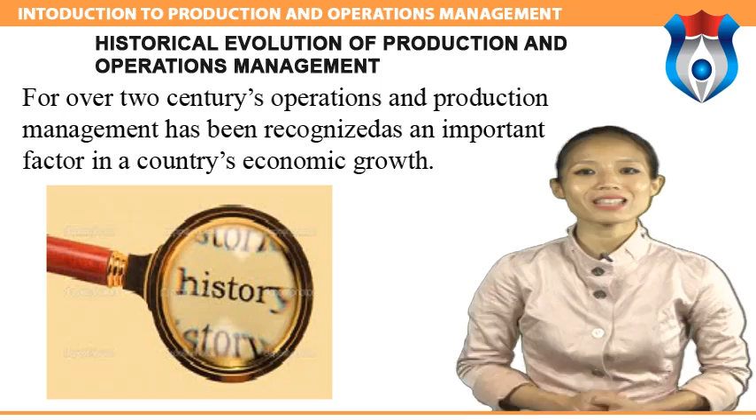In the early 20th century, F.W. Taylor implemented Smith's theories and developed scientific management. Workers were studied in great detail to eliminate wasteful efforts and achieve greater efficiency. At the same time, psychologists, sociologists, and other social scientists began to study people and human behavior in the working environment. In addition, economists, mathematicians, and computer scientists contributed newer, more sophisticated analytical approaches.

With the 1970s emerged 2 distinct changes in our views. The most obvious of these, reflected in the new name operation management, was a shift in the service and manufacturing sectors of the economy. As the service sector became more prominent, the change from production to operations emphasized the broadening of our field to service organizations. The second, more subtle change was the beginning of an emphasis on synthesis rather than just analysis in management practices.

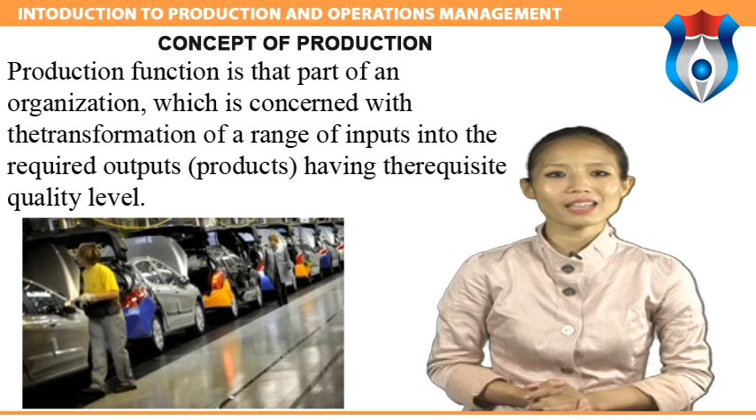Now moving on to the next topic, we will study the concept of production. Production function is that part of an organization which is concerned with the transformation of a range of inputs into the required outputs, products, having the requisite quality level. Production is defined as a step-by-step conversion of one form of material into another form through chemical or mechanical process to create or enhance the utility of the product to the user. Production is a value addition process. At each stage of processing, there will be value addition.

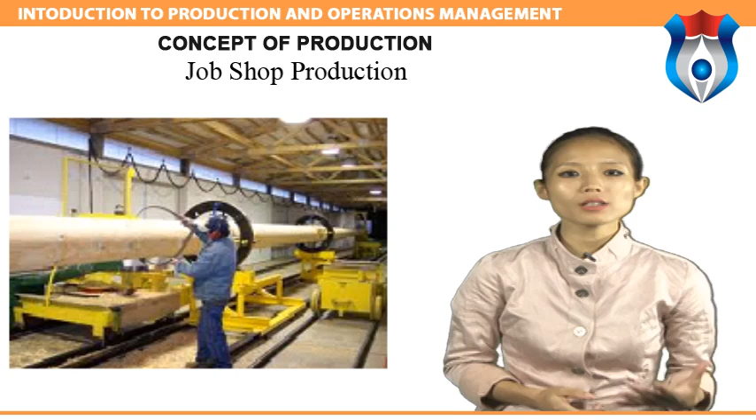Classification of production system. Production systems can be classified as job shop, batch, mass, and continuous production systems. Job shop production. Job shop production is characterized by manufacturing one or few quantities of products designed and produced as per the specification of customers within prefixed time and cost. The distinguishing feature of this is low volume and high variety of products. A job shop comprises general purpose machines arranged into different departments. Each job demands unique technological requirements and processing on machines in a certain sequence.

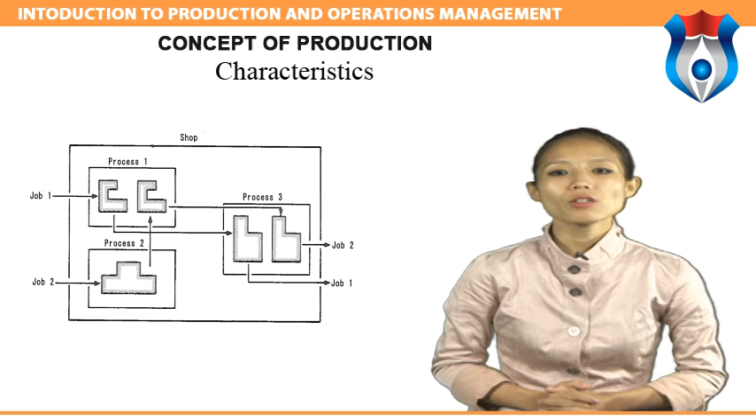The job shop production system is followed when there is high variety of products and low volume, use of general purpose machines and facilities, highly skilled operators who can take up each job as a challenge because of uniqueness, and a large inventory of materials, tools, and parts. Detailed planning is essential for sequencing the requirements of each product, capacities for each work center, and other priorities.

Advantages of job shop production are: because of general purpose machines and facilities, a variety of products can be produced. Operators will become more skilled and competent as each job gives them learning opportunities. Full potential of operators can be utilized. Opportunity exists for creative methods and innovative ideas. Now let's look at the limitations of job shop production. Higher cost due to frequent setup changes, higher level of inventory at all levels and hence higher inventory costs. Production planning is complicated, and there are larger space requirements.

Batch production. Batch production is defined by the American Production and Inventory Control Society (APICS) as a form of manufacturing in which the job passes through the functional departments in lots or batches and each lot may have a different routing.

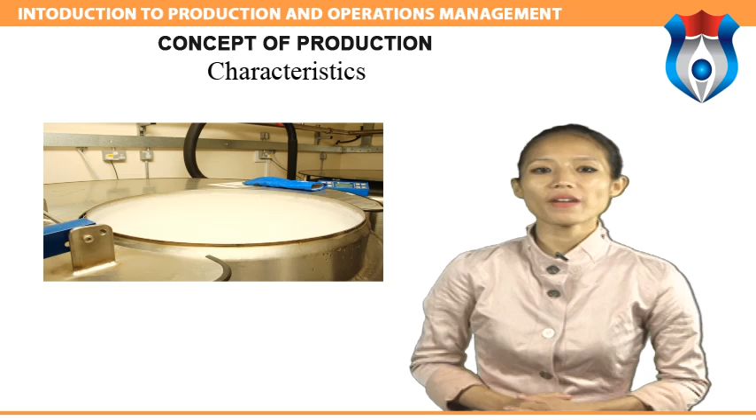It is characterized by the manufacture of a limited number of products produced at regular intervals and stocked awaiting sales. Batch production system is used under the following circumstances: when there are shorter production runs, when plant and machinery are flexible, when plant and machinery setup is used for the production of items in a batch and change of setup is required for processing the next batch, when manufacturing lead time and costs are lower as compared to job order

production. The advantages of batch production are: better utilization of plant and machinery, promotes functional specialization, cost per unit is lower as compared to job order production, lower investment in plant and machinery, flexibility to accommodate and process a number of products, job satisfaction exists for operators.

Let's look at the limitations of batch production. Material handling is complex because of irregular and longer flows. Production planning and control is complex. Work in process inventory is higher compared to continuous production.

Mass production. Manufacture of discrete parts or assemblies using a continuous process is called mass production. This production system is justified by a very large volume of production. The machines are arranged in a line or product layout. Product and process standardization exists and all outputs follow the same path.

Mass production is used under the following circumstances: standardization of product and process sequence, dedicated special purpose machines having higher production capacities and output rates, large volume of products, shorter cycle time of production, lower in-process inventory, perfectly balanced production lines. The advantages of mass production are: higher rate of production with reduced cycle time, higher capacity utilization due to line balancing, less skilled operators are required.

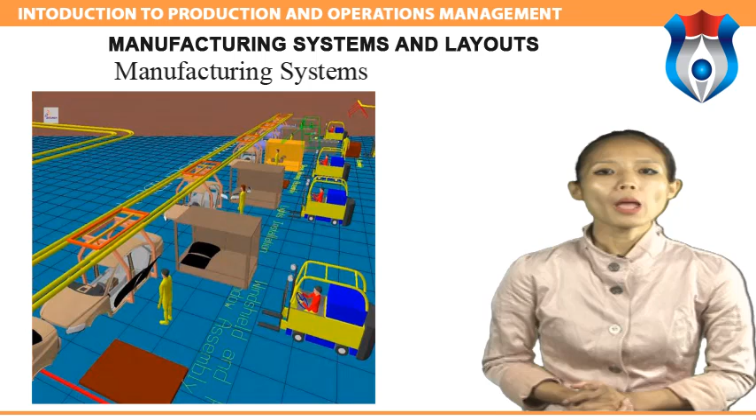Let us now talk about the manufacturing system and layouts. Manufacturing is an organized activity devoted to the transformation of raw materials into marketable goods. The manufacturing system usually employs a series of value-adding processes to convert raw materials into more useful forms and eventually into finished products. In an industrialized country, the manufacturing industries are the backbone of the national economy because it is mainly through their activities that the real wealth is created.

Manufacturing system management is a discipline built upon a collection of methodological tools brought together to effect an integrated or total approach to problem solving in manufacturing, engineering and management with productivity improvement as its overall objective. Layouts. In manufacturing, facility layout consists of configuring the plant site with lines, buildings, major facilities, work areas, aisles and other pertinent features such as department boundaries.

Process layout. Process layouts are found primarily in job shops or firms that produce customized, low-volume products that may require different processing requirements and sequences of operations. Process layouts are facility configurations in which operations of a similar nature or function are grouped together.

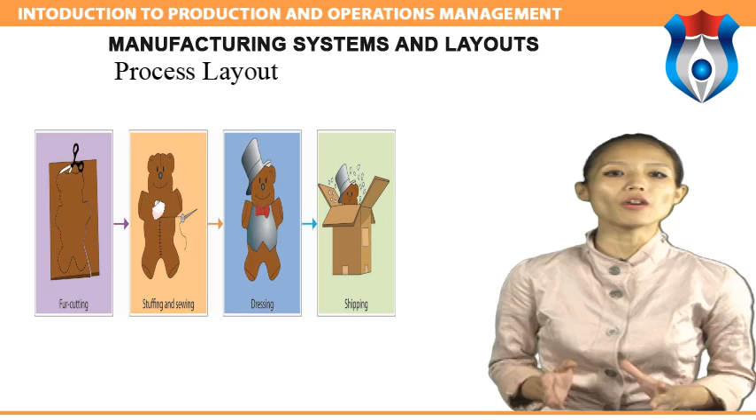Improving process layout involves the minimization of transportation cost, distance or time. To accomplish this, some firms use what is known as a Muther grid, where subjective information is summarized on a grid displaying various combinations of department, work group or machine pairs.

Advantages of process layout include flexibility. The firm has the ability to handle a variety of process requirements. Cost. Sometimes the general purpose equipment utilized may be less costly to purchase and less costly and easier to maintain than specialized equipment. Motivation. Employees in this type of layout will probably be able to perform a variety of tasks on multiple machines as opposed to the boredom of performing a repetitive task on an assembly line.

Cost. If batch processing is used in process, inventory costs could be high. Lower volume means higher per unit cost. More specialized attention is necessary for both products and customers. Confusion. Constantly changing schedules and routines make juggling process requirements more difficult.

Product layout. Product layouts are found in flow shops, repetitive assembly and process or continuous flow industries. Flow shops produce high volume, highly standardized products that require highly standardized repetitive processes. Two types of lines are used in product layouts, paced and unpaced. Paced lines can use some sort of conveyor that moves output along at a continuous rate so that workers can perform operations on the product as it goes by.

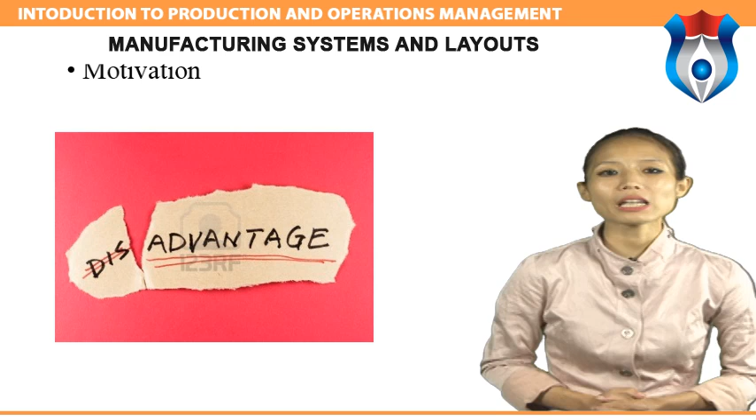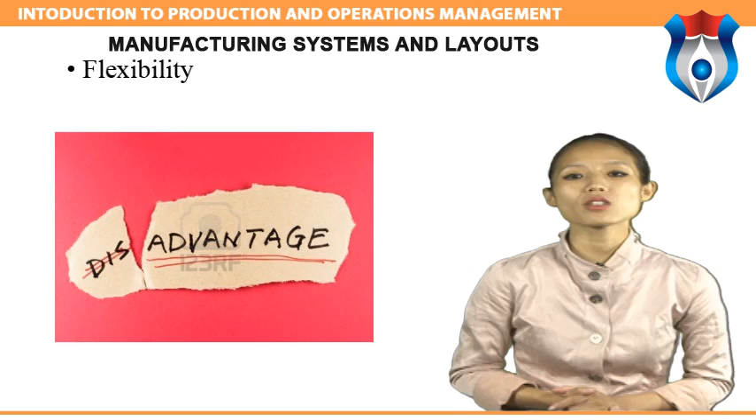Disadvantages of product layout include motivation. The system's inherent division of labor can result in dull, repetitive jobs that can prove to be quite stressful. Also, assembly line layouts make it very hard to administer individual incentive plans. Flexibility. Product layouts are inflexible and cannot easily respond to required system changes, especially changes in product or process design.

Fixed position layout. A fixed position layout is appropriate for a product that is too large or too heavy to move. For example, ships are not produced on an assembly line. For services, other reasons may dictate the fixed position. Example, a hospital operating room where doctors, nurses and medical equipment are brought to the patient. Other fixed position layout examples include construction, for example buildings, dams and electric or nuclear power plants, shipbuilding, aircraft, aerospace, farming, drilling for oil, home repair and automated car washes.

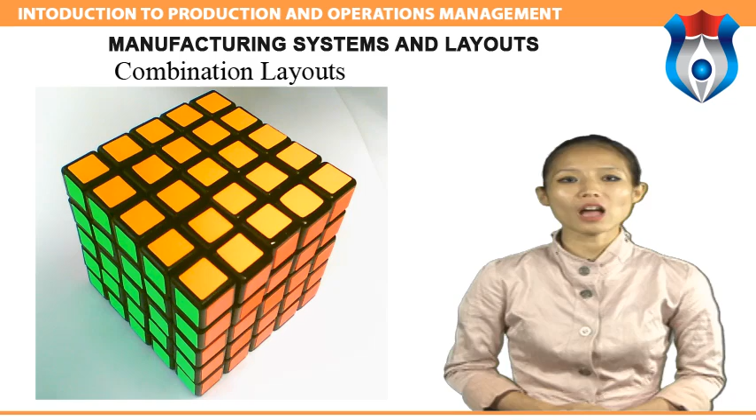Combination layouts. Many situations call for a mixture of the three main layout types. These mixtures are commonly called combination or hybrid layouts. For example, one firm may utilize process layout for the majority of its process along with an assembly line in one area.

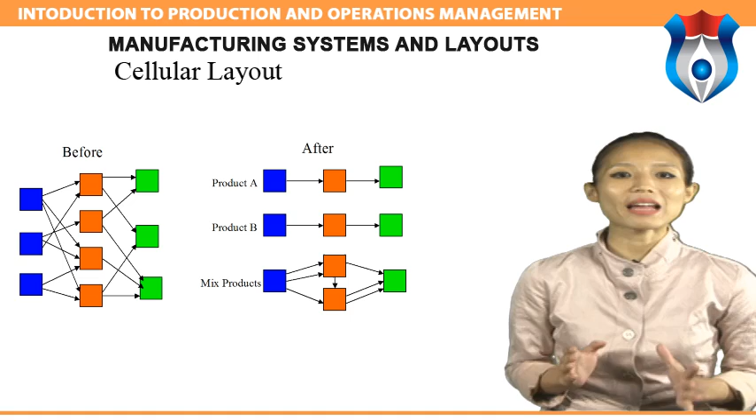Cellular layout. Cellular manufacturing is a type of layout where machines are grouped according to the process requirements for a set of similar items, part families that require similar processing. These groups are called cells. Therefore, a cellular layout is an equipment layout configured to support cellular manufacturing. Workers in cellular layouts are cross-trained so that they can operate all the equipment within the cell and take responsibility for its output.

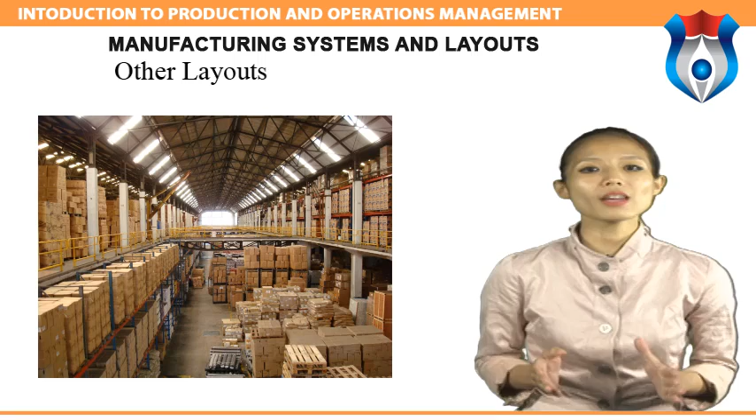Other layouts. In addition to the aforementioned layouts, there are others that are more appropriate for use in service organizations. These include warehouse or storage layouts, retail layouts, and office layouts. With warehouse or storage layouts, order frequency is a key factor. Items that are ordered frequently should be placed close together near the entrance of the facility, while those ordered less frequently remain in the rear of the facility.

Now we will study the significance and systematic view of operations. A system is a group of interrelated items in which no item studied in isolation will act in the same way as it would in the system. A system is divided into a series of parts or subsystems, and any system is a part of a larger system.

Systematic view of operations. The system boundary defines what is inside the system and what is outside. A system environment is everything outside the system boundary that may have an impact on the behavior of the system. A system's inputs are the physical objects or information that enter it from the environment, and its outputs are the same which leave it for the environment.

The operation system is concerned with converting the transformed resources from inputs into outputs in the form of goods and services. There are three main types of transformed resources of materials which can be transformed either physically, for example manufacturing, by location, for example transportation, by ownership, for example retail, or by storage, for example warehousing, or other private services. Government services.

Significance of operation management. Operation management refers to the complex set of management activities involved in planning, organizing, leading, and controlling an organization's operations. At one time, operation management was considered the backwater of management activities, a dirty, drab necessity.

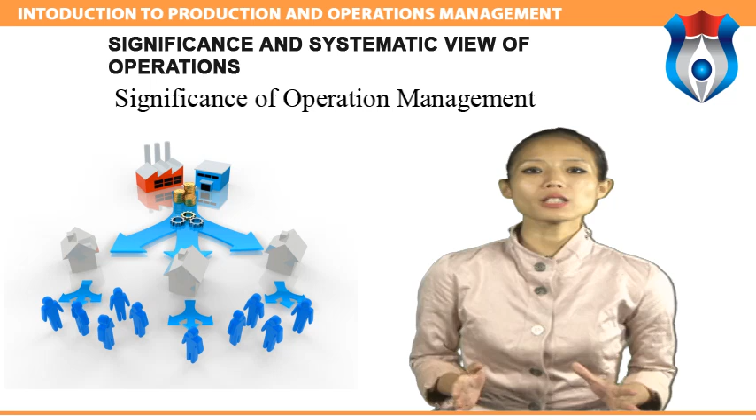Let's now look at how to improve productivity. Productivity, the ratio of output to input, is a measure of a manager's or an employee's efficiency in using the organization's scarce resources to produce goods and services. The higher the numerical value of this ratio, the greater the efficiency.

Land, labor, capital, and entrepreneurship. These are four generally recognized factors of production. Land. This category sometimes extends over all natural resources. Labor. The classical labor theory of value was an innovative theory in response to the physiocratic doctrine that only land could yield surplus.

Capital. This most controversial of factors is variously defined as produced equipment, as finance used to acquire produced equipment, as all finance used to begin and carry on production, including the wage fund, and as the assessed value of the whole productive enterprise, including intangibles such as goodwill. Entrepreneurship. Until the 20th century, this function was assigned to the capitalist and frequently conflated with capital.

For any business to operate, certain resources need to be accessible to people who want to run this business. The name, in economic terms, of these resources is factors of production. Now let's suppose we want to open up a coffee shop. So we've got this dream or this vision that we think this business will be successful. There's a plot of land that's available for sale. That's one thing that we need.

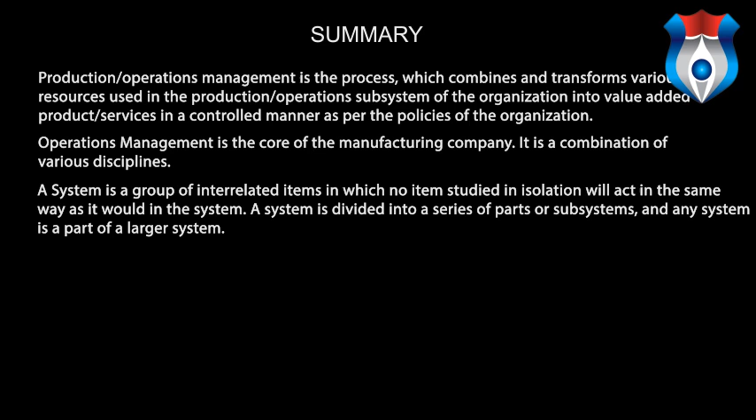A system is a group of interrelated items in which no item studied in isolation will act in the same way as it would in the system. A system is divided into a series of parts or subsystems, and any system is a part of a larger system. Productivity, the ratio of output to input, is a measure of a manager's or an employee's efficiency in using the organization's scarce resources to produce goods and services. Operation management refers to the complex set of management activities involved in planning, organizing, leading, and controlling an organization's operations.